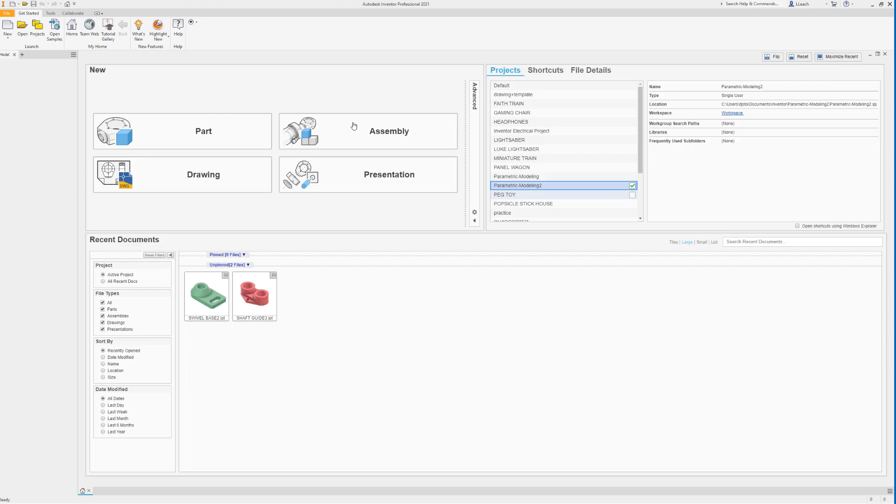So what I'm going to do is, to start this off, I'm going to go to New. We're going to use English Standard, hit the Create button. I'm going to start a 2D sketch on this back plane here, the XY. Then I'm going to draw a rectangle. I like using the 2-point center because it locks it right in the center and constrains it right there.

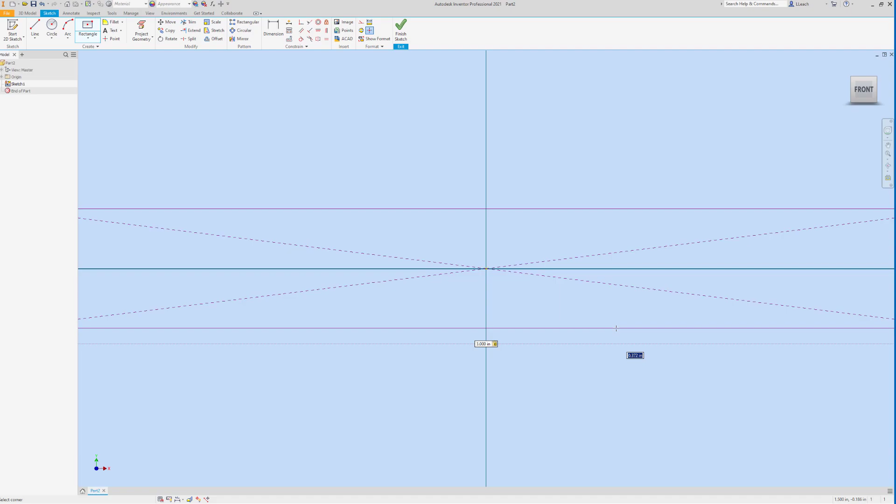So I'm going to click this green dot, drag it out. This is going to have a dimension of 3 inches on the bottom, so 3, tab, and then I'm going to type in 2.25 for the height, press tab, press enter, scroll out a little bit. So there is kind of the shape of our object here.

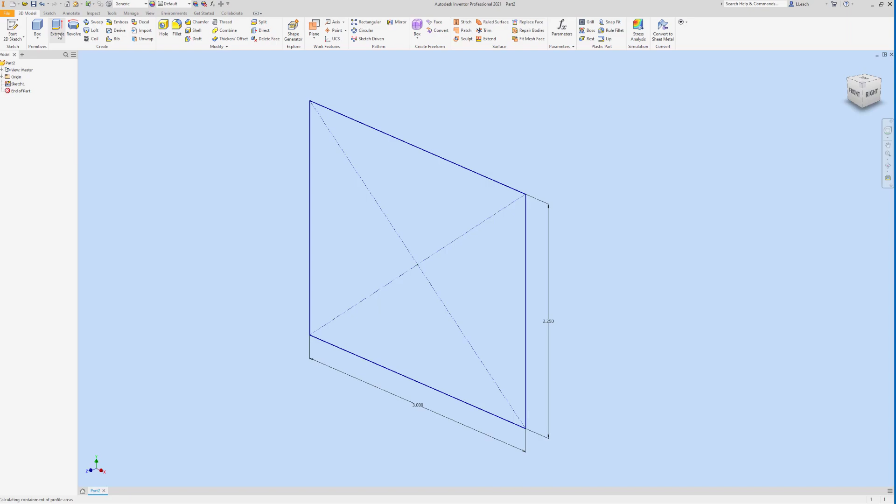So then I'm going to finish my sketch. I'm just going to block this off first, and then we'll chip away at it a little bit at a time as we go. So then I'm going to extrude this. I want to extrude it symmetrically, equal in both directions. This is going to have a distance of 2.

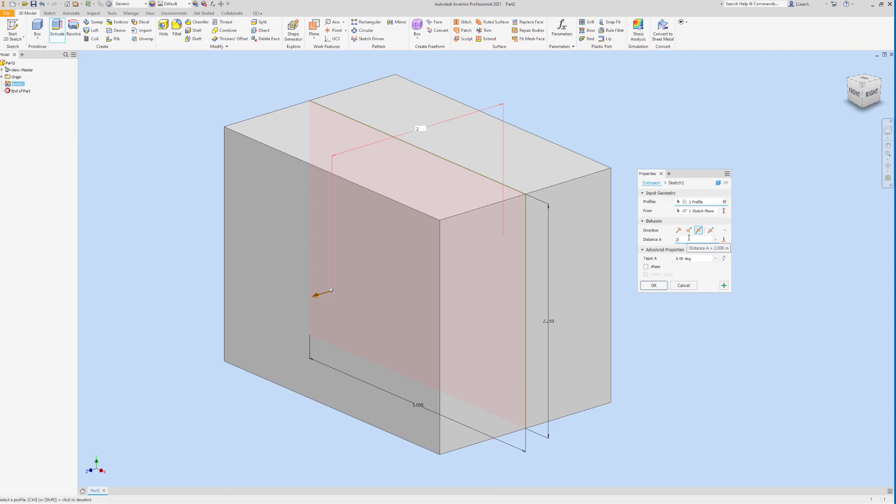So when I first saw this, I was like, oh, they don't tell you what that dimension is. It's going to be one of those finding buried treasure things, but that dimension is 2. That helps you out, completely helps you out, and makes this problem a lot easier. So yeah, that's going to have a distance of 2 for the depth there.

And then what I'm going to do is, like I said, I'm going to start chipping away at this thing. So I'm going to sketch what I know here. I'm going to start my 2D sketch again on this front plane here, and then I'm just going to project geometry, the whole outer box. I don't really know if that helps, but anyway, I did it.

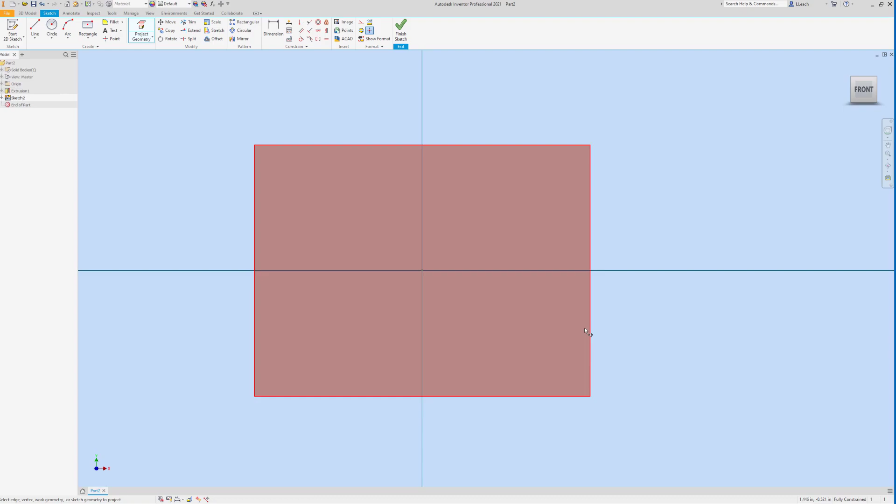So then what I need to do is draw this kind of angled line. I'm going to draw a line somewhere here, come up somewhere up here. Right click, hit OK. I'm going to dimension this end of the line to the bottom here. That is 0.75.

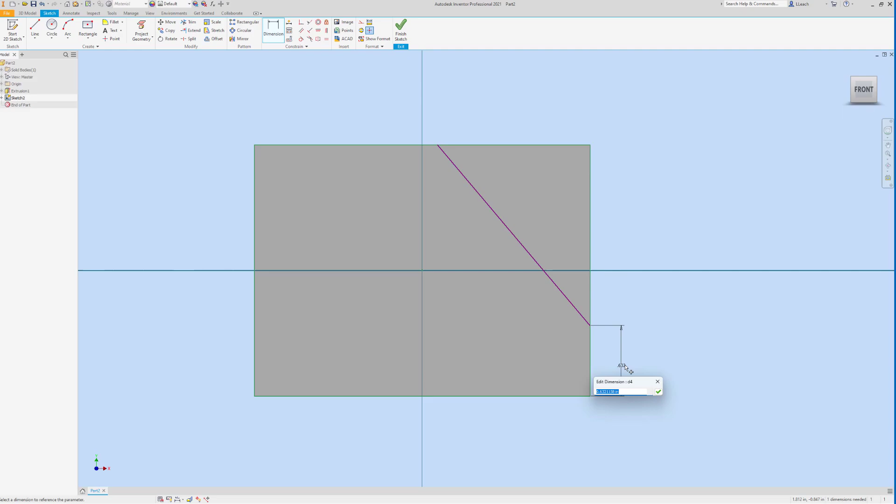And then I know this has an angle from here to here of 30 degrees, like so. Yeah, so probably, I don't know. I'm debating whether I should finish it here and then extrude that, or just do the next one here.

I must draw a line from where this end of this line is, down somewhere. So instead of doing it in 2 steps, we'll do this in 1. I don't know if that's a good idea or not, to be honest, but I know that this line is perpendicular to this line. So I'm going to use my constraint here, go to perpendicular, click this line, click this line.

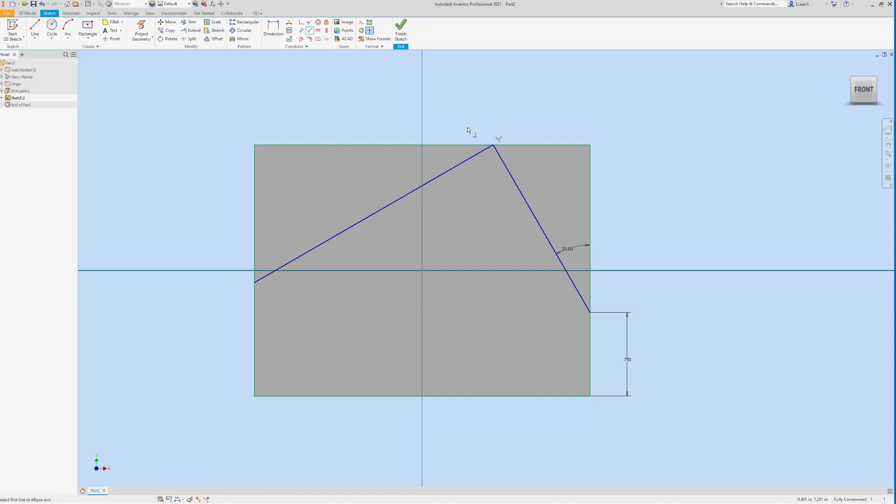So now it makes that perpendicular like it needs to be, because that's a 90-degree angle there. I'm going to finish the sketch. I'm going to extrude this and this, but I want to cut it, and I want it to go all the way through. Hit OK. All right, so we got like a little fancy smancy roof looking thing on there.

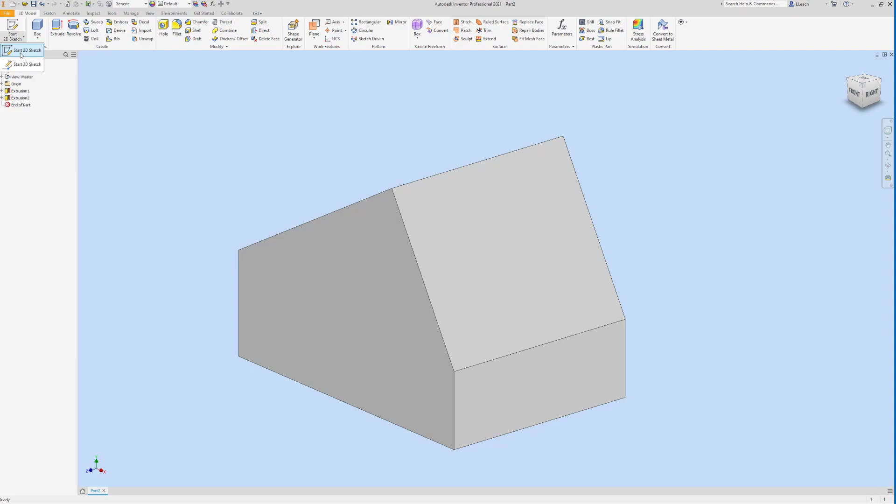Anyway, so yeah, so there's that. So then what I want to do now is start a 2D sketch on this angled face here, and then project geometry again. I don't know, it might be overkill, but I'm just going to project this whole shape here to get all the outer lines.

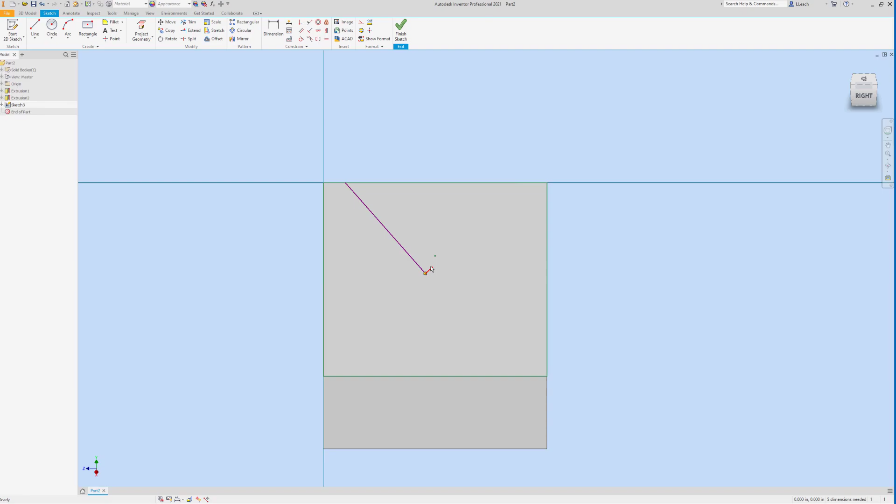I'm going to go to line. I'm going to draw a line from here at the top and kind of angle it down. It's going to go in the middle somewhere, but I'm going to try not to lock it in anywhere, and then back up over here somewhere. Wait, I need to erase that little gobbledygook. Or I could maybe just extend this. Yeah, let's do that. Anyway, you need to draw a line kind of down and then back up. I did it the hard, difficult way anyway.

So then I want to dimension where that edge is. That's going to be 0.2.

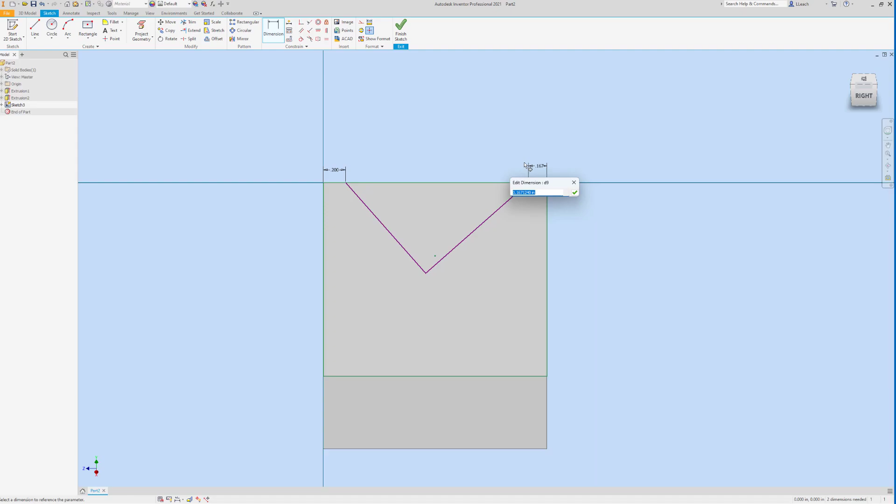And the same thing here, this one and this one. This one is 0.2, I'm just going to click this to make them equal. Hit OK there. And then these are going to be perpendicular, so I'm going to click my perpendicular constraint again, because this is 90 degrees here and here.

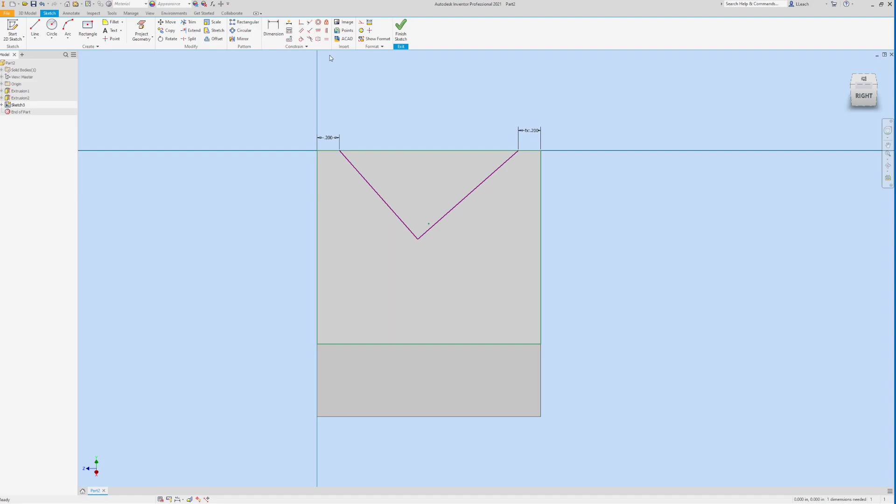And then this needs to be right in the middle. So when I tried this earlier to dimension, I want to dimension this end here to like one of the sides. If I can, here and here, there we go. So that needs to be, if I know that this has a distance of 2, I know this needs to be 1. All right, so there we go.

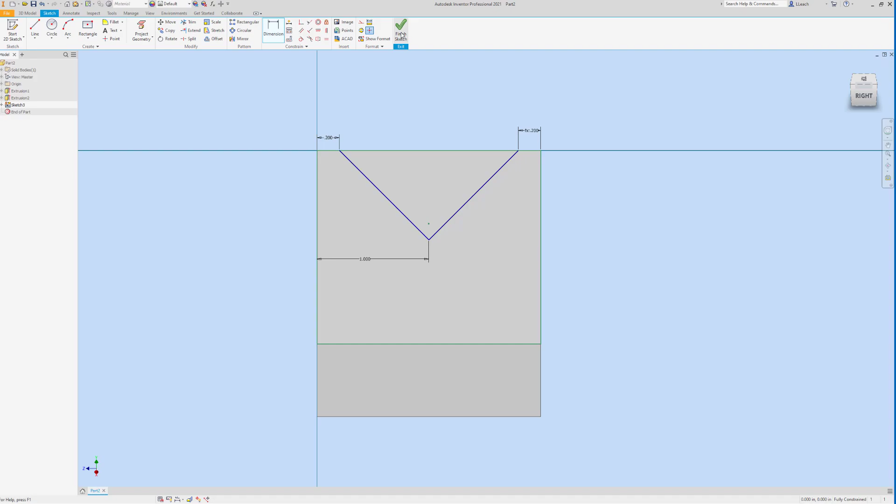Then what I want to do is finish my sketch. I'm going to extrude this triangle shape. I'm going to cut it. I want it to go all the way through. And then I'm going to hit OK.

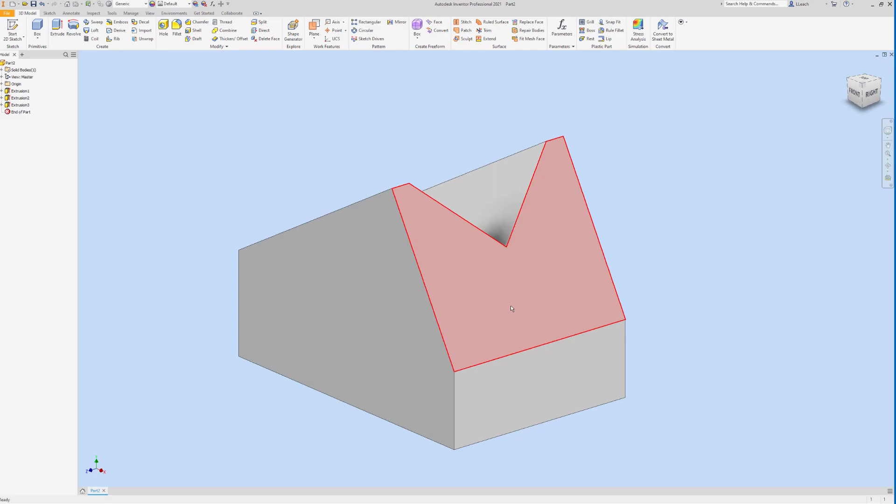So there's that part. And then what I want to do now is create these chamfered edges here. I wonder if I can chamfer those off, but you probably can, I'm just not that fancy.

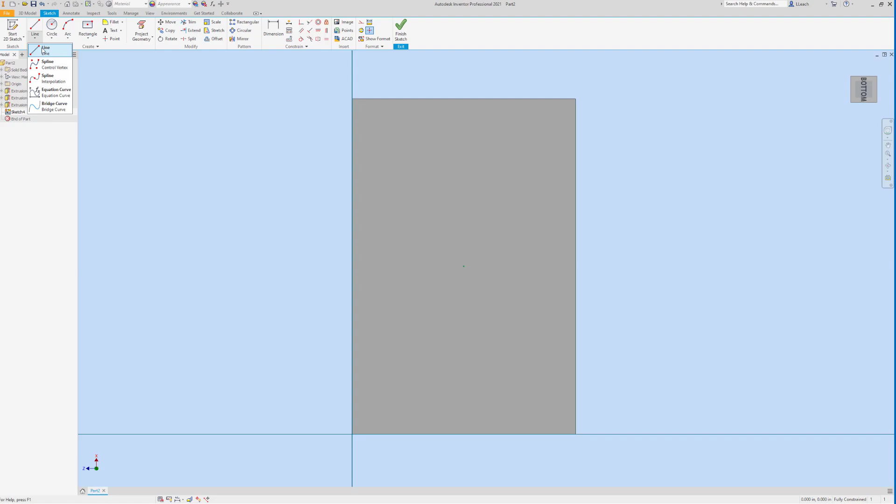So what I'm going to do is start a sketch on the bottom plane. I'll just start my 2D sketch on the bottom. Pay attention to which way it flips, because you might lose which side you want. So I need to draw a line from here down, and draw another line from here down, and I'm going to dimension these.

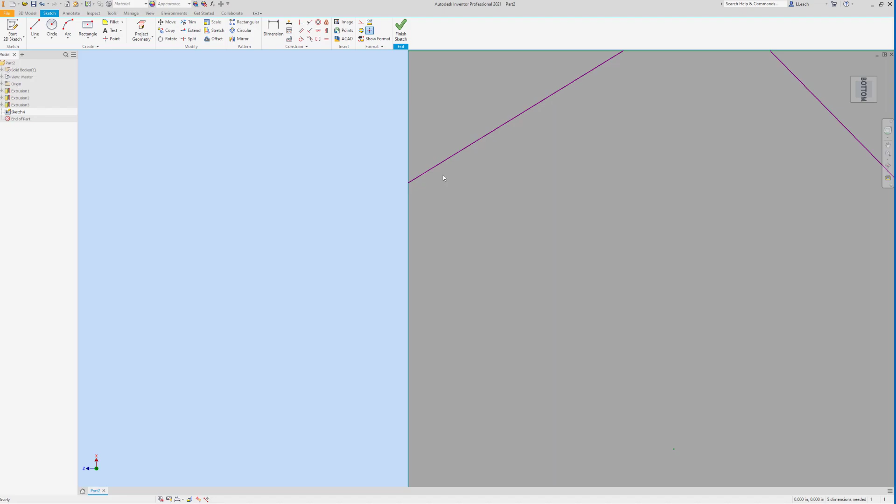I'm going to dimension, wait, I don't know why it does that, it puts like a little extra gobbledygook line. Yeah, make sure it doesn't draw any extra lines on you. Anyway, now I'm going to dimension this end to the side. That's going to be 0.75.

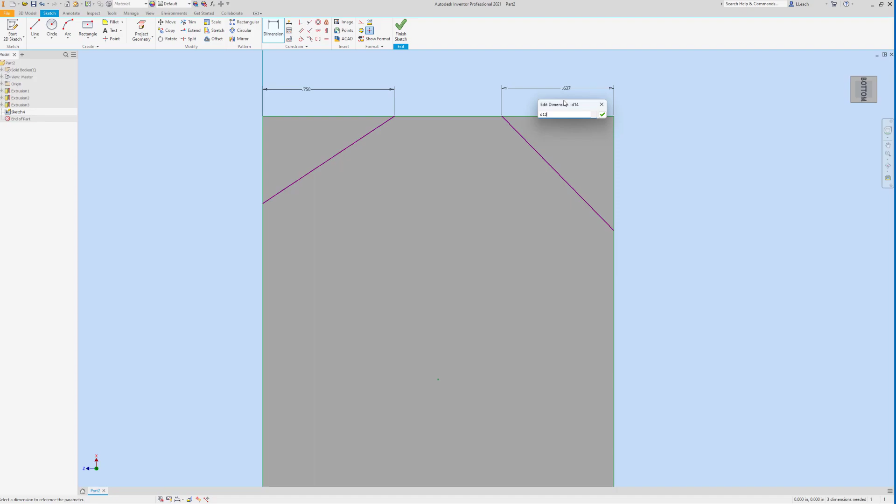Same thing here, from here to here. I'm just going to select this one so that they're equal. And then that has a, from here to here is 30 degrees. That's 30. Ooh, extend it out of there a little bit.

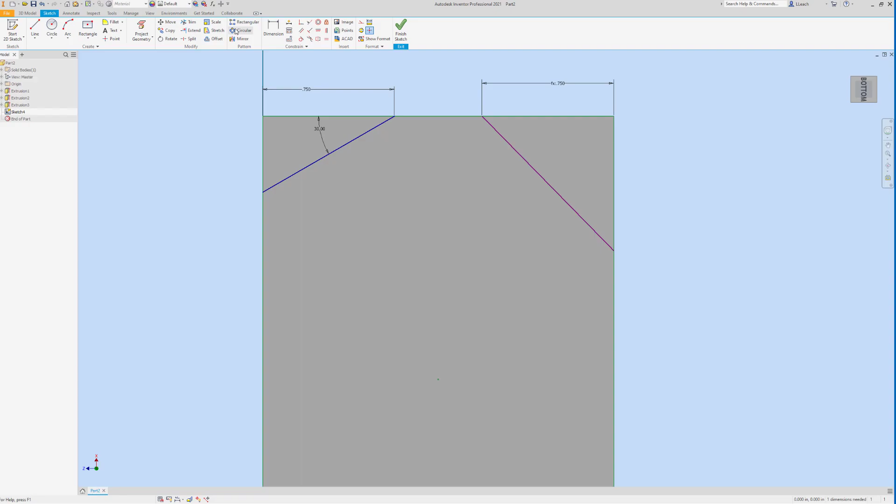I'm going to trim that thing off, I don't want you there. All right, so then I'm going to dimension this line, this back edge here. That's going to be that dimension. I'm going to click this to make them the same. And we got that. Now I've finished my sketch.

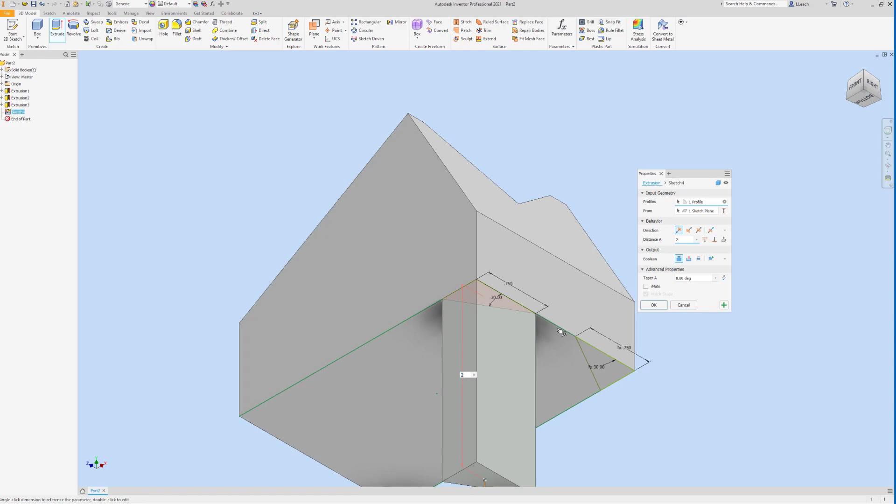I'm going to extrude this and this, but I want to do it as a cut. And I'm going to extrude it all the way up, or through all. Yeah, through all, click on OK. Then I think we're good.

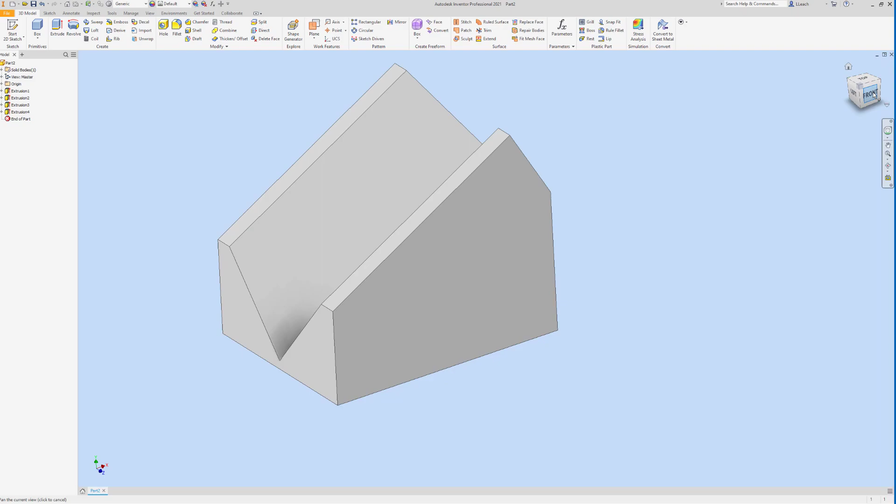So there's our V-block example. Looking it over, I think we're good.

So yeah, then we can just add some kind of a fancy smancy. Now, if you want to add a material on here, we could. Let's add a material on here. Let's add, what can we do? We can add maybe a steel carbon, I don't know, just, you know, for example. And that way, when you add steel carbon, you can see if you got yours the same as I got mine, which is what another user had recommended.

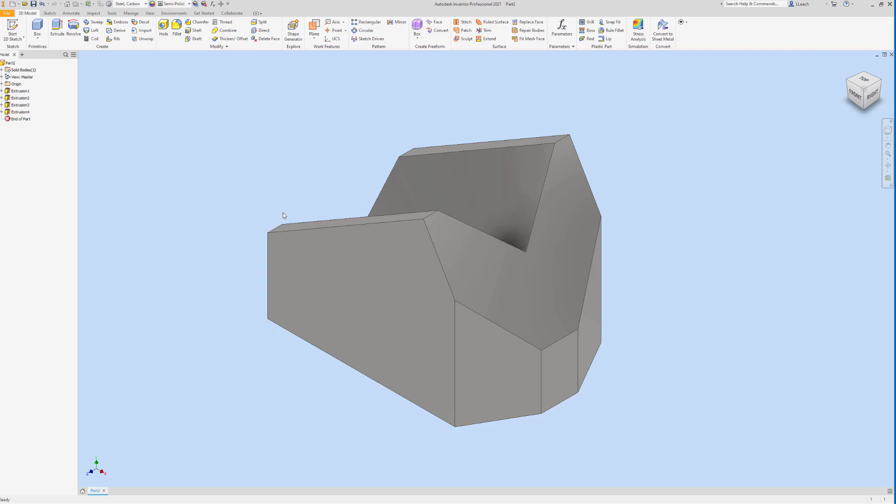And so now what you would do is you would go to File, iProperties. You would click on Physical. Now you would update it, click the update. So now with our material on there, our volume is 7.571 cubic inches, our area is 27.152 square inches. So when you're taking the certification exam, it has you do this a lot, because that way it knows if you did the problem correctly or not.

I don't know why I just hit my microphone. I'm talking with my hands like y'all can't see what I'm doing anyway. So what's the point? But anyway, so yeah, if y'all did the same that I did, you should get the same mass, same area, same volume, blah blah blah.

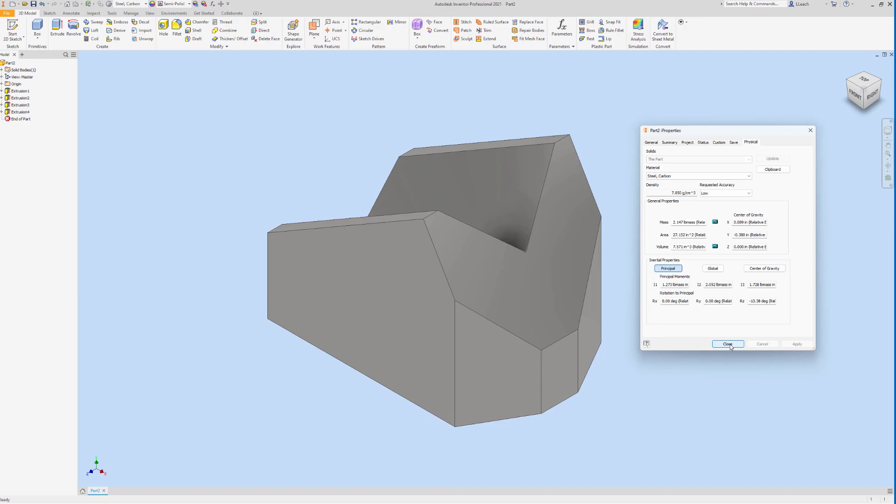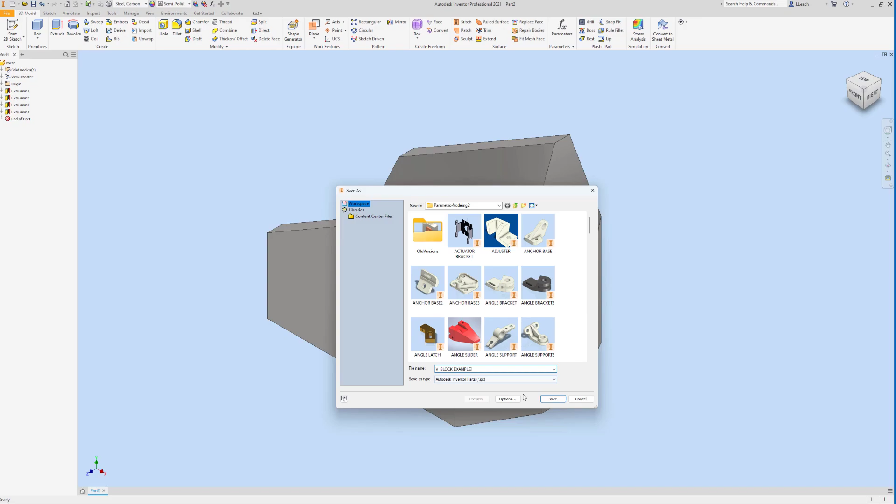Anyway, so I'm going to close this, and we want to save it. We're going to save this. So in the book, this one is just called the V-block example. I'm just going to call it V underline block, if I can spell correctly. Example. Hit save.

You can even get fancy. You can add some shadows and reflections and make it perspective, and you can change the lighting to photo booth, which is what I like to do. Yeah, do we have it shadow? Yeah, okay, so there we go.